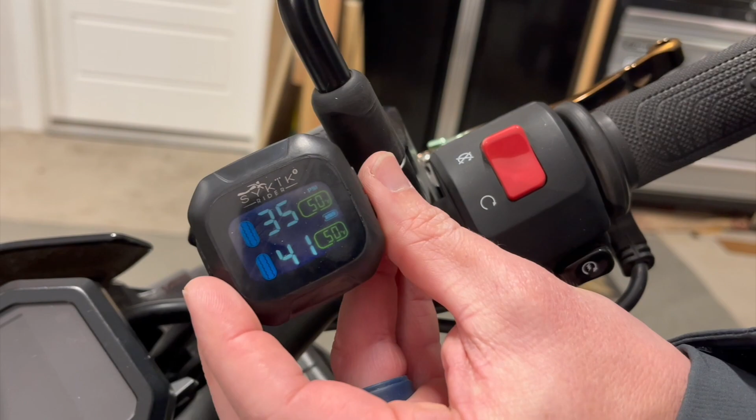Let's go. So I think I want to put it right here on this mirror mount, and I kind of want it to be like just like that. I think that would be perfect. So I think what I'll do is I'll start measuring and get some designing done.

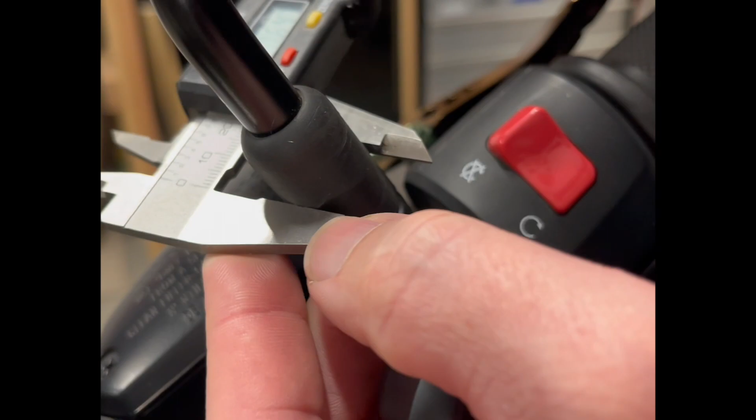And I'm in Fusion 360. Make sure I'm in millimeters because that's what I'm going to be basing measurements off of. And I'll start a sketch. So I want to mount this around the mirror post, and I measured that as 20 millimeters.

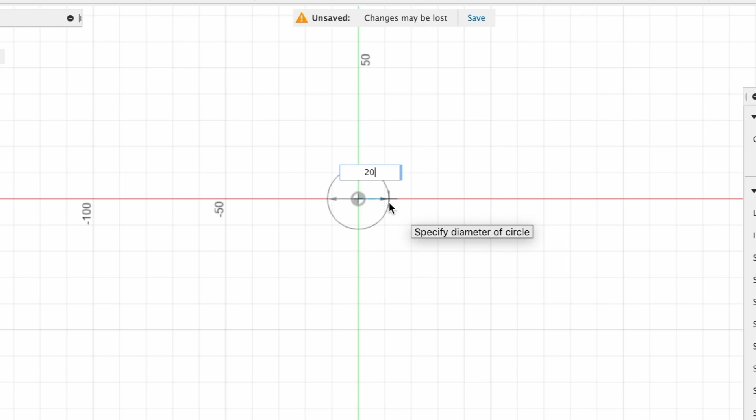So I'm just gonna put in 20 there, and then I'm going to do an offset from this, and I'll make that—what's 4 look like? Yeah, we'll do that 4 millimeters thick. Okay, and then I'm going to draw a construction line.

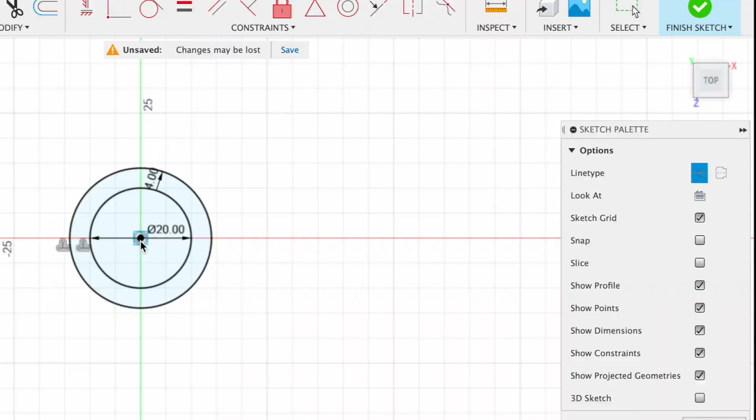Just for measurement purposes. And then, because I need to split this so that it can go around the mirror, I'm going to draw another construction line. I'll go out 4 millimeters. And another construction line, 4 millimeters. Again, this is really just so that I can get an accurate cut here on this.

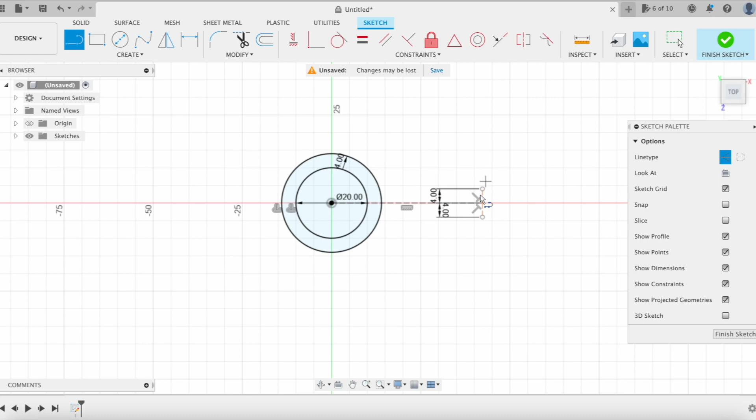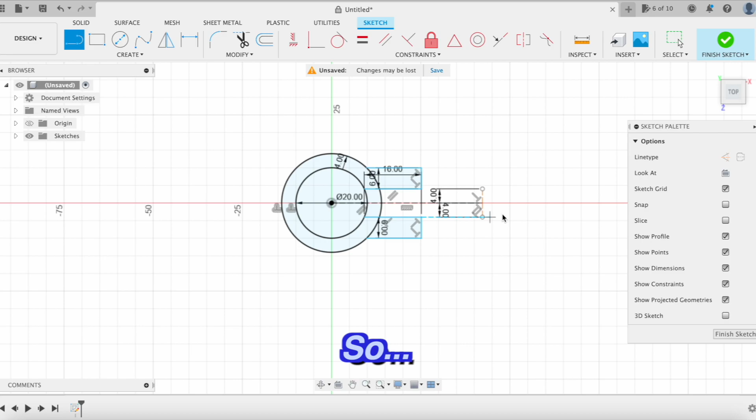Turn off construction lines. We'll do 15—no, it's 16. And then I'm going to do the same thing on this side here. I could have just mirrored all of this, but I didn't. So that's pretty much it for that.

So this is going to give me my opening for the mount, and I'll be able to stick it into the mirror post, and then it'll give me adequate area to put like a nut and bolt through. And then on this side, I need to kind of make a line that goes out so that I can mount the monitor itself. I need to make sure I get it kind of out here more.

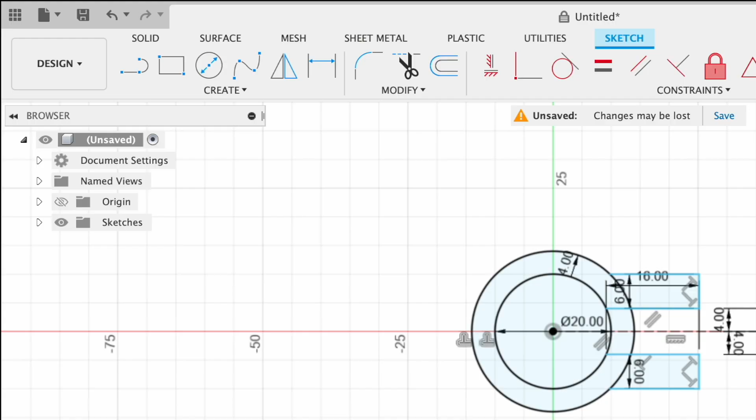So I'm going to, maybe I'll do a spline. I kind of want it out here. I'll do a line. Gotta make sure that this is big enough. And then I'm just gonna cut away parts of this that I don't need anymore.

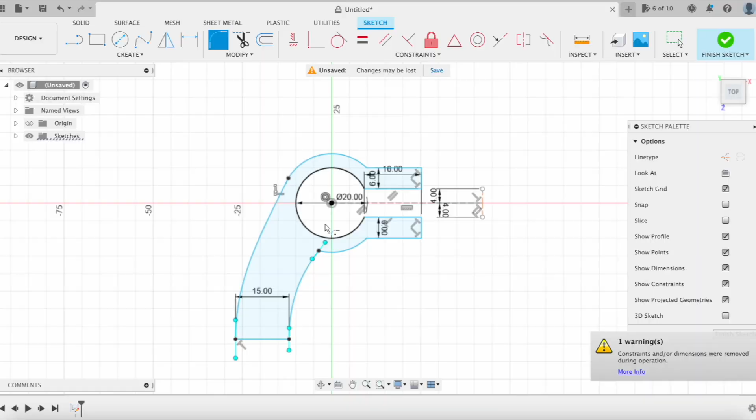I think I'm going to go ahead and add some fillets now. I think I'm okay with the overall shape right now. I think I'm ready to extrude it out. Again, nothing is really defined here—like you can still see it's blue, not black—but again, it really doesn't matter at this point.

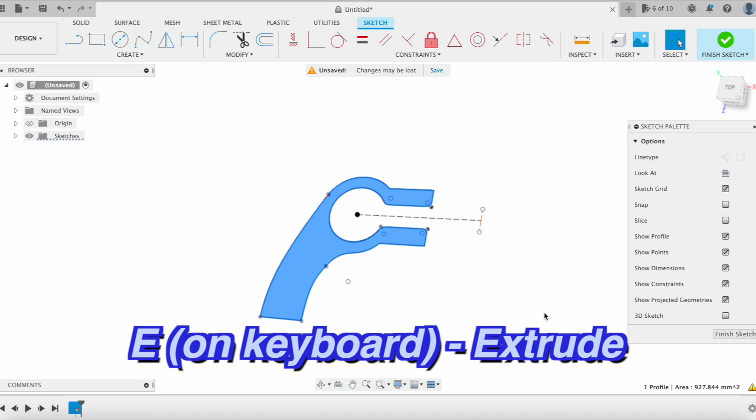And this needs to be 9 millimeters thick, pretty good. So I do want to make this part here a little bit thicker so I can put a bolt and a nut through. So I do need to extrude this part out.

But before I do that, I got to create another sketch. I'll do it on this face, and then I kind of want to—I'm going to use this top shape, so I hit P to project that, and now I can use these points to help my extrusion.

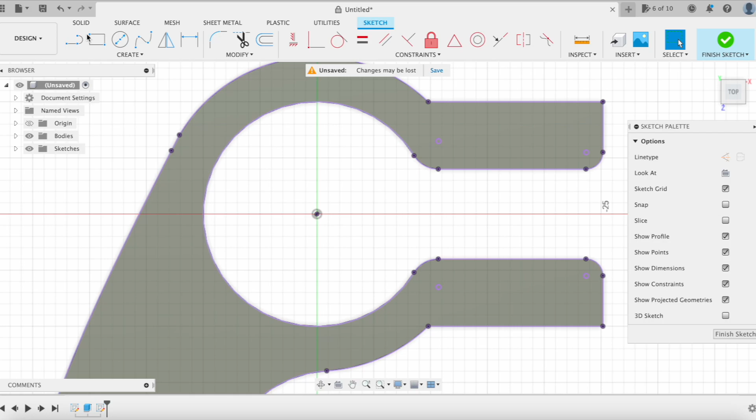So I'm going to do a line, I think I'll go to that point there, and there to there. So now I can use this to extrude this out. So this is 9, I want it to be a total of 15 millimeters, so I can extrude it out 6 millimeters.

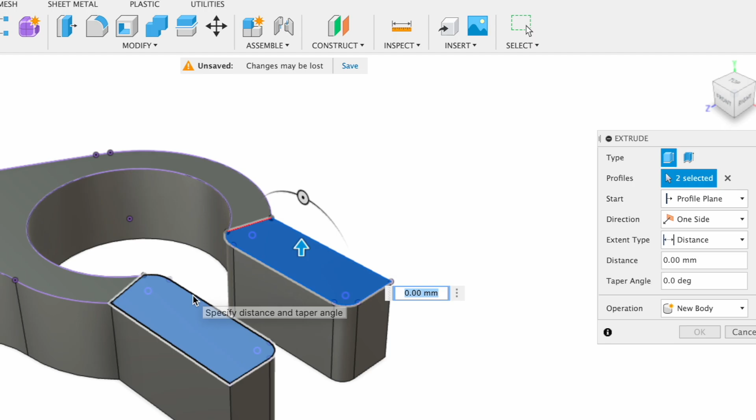That might be a little too tall. Yeah, that looks better. Okay, now I'm going to go ahead and put in the holes.

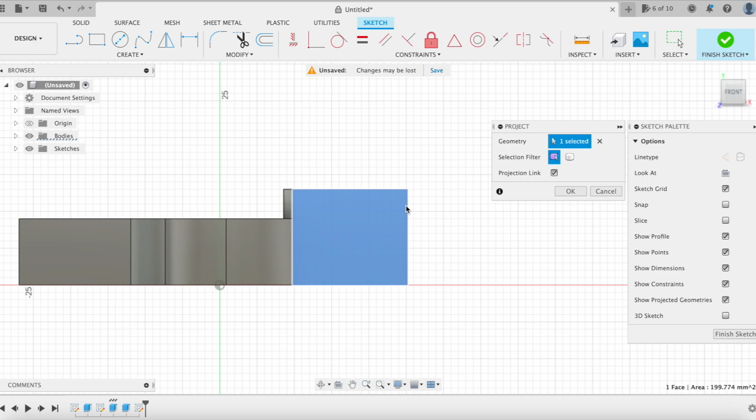Create a new sketch on that face there. I'm going to press P to project this. Okay, now I can use that as a measuring point.

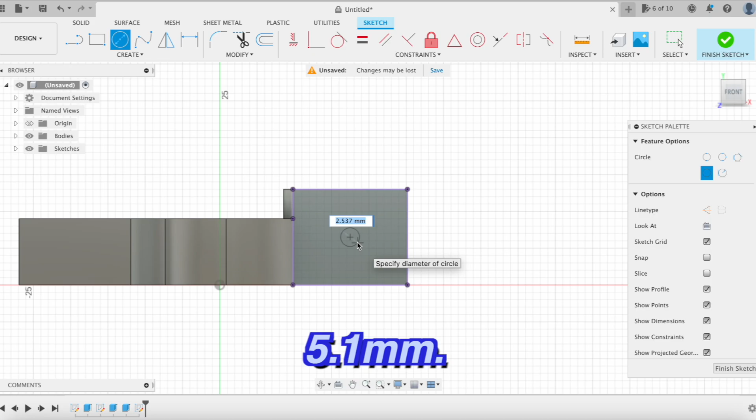So I'm going to get my circle, find the midpoint there, and this needs to be my inner circle for the bolt to go through. That's going to be 5.1 millimeters. I'm going to be using an M5 screw and nut, and I'll do an inset for the bolt head. I'll do 8 millimeters for that.

Redo that polygon. And then I'm going to constrain it by making this line parallel to this line.

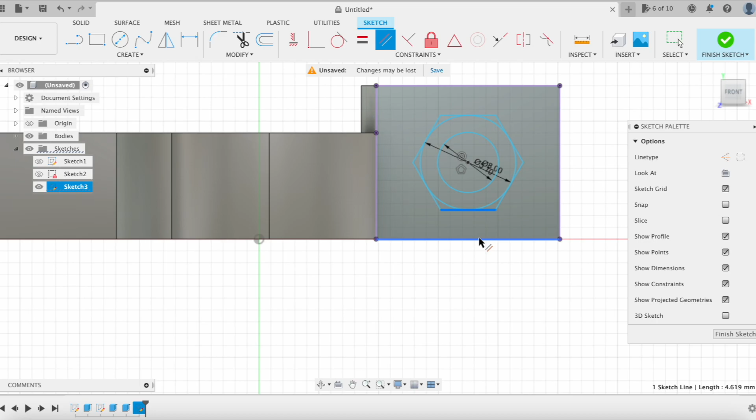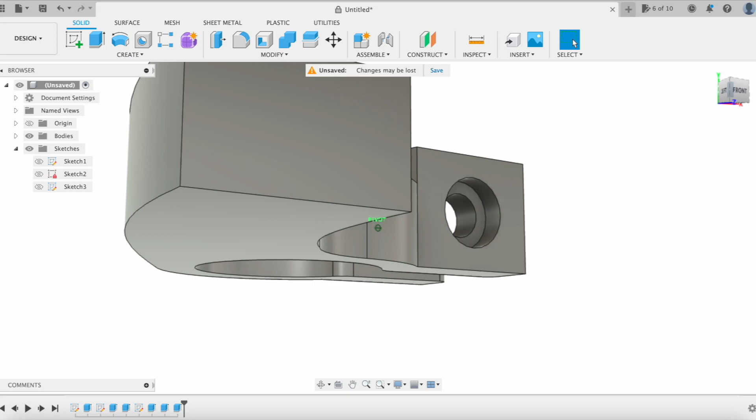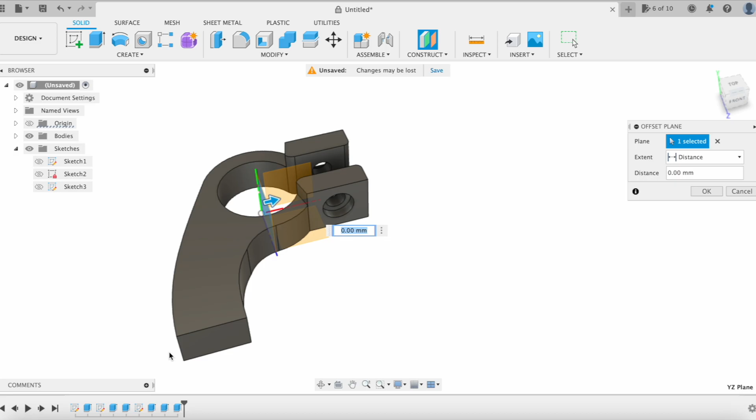So now what I'm going to do is make a new plane so that I can sketch out how I want this part to be, and I need it to be a sketch onto this side because I need to get an angle here that I can extrude out the other way. So what I'm going to do is make an offset plane. Let's do that one, and I want it to go to here.

Doesn't have to be perfect right now. Okay, now I can create a sketch on this plane, and then I'm going to project this.

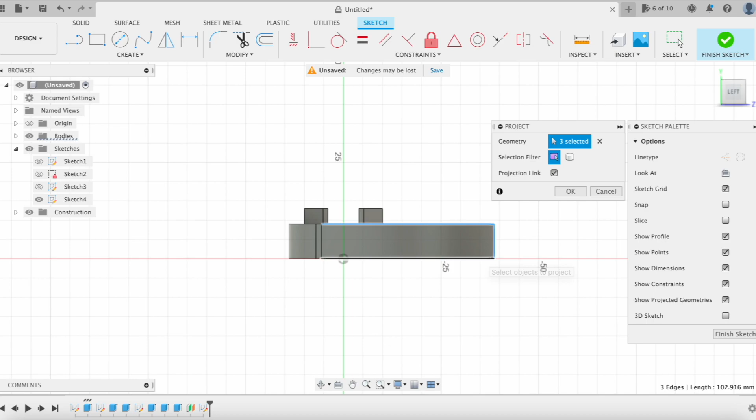So now I'm just going to do some lines, and I want to get the angle right here. So I think I'm going to do a 60-degree angle. I need this to be roughly 30 tall, and 60 degrees, bingo. And then a new line, it's going to be 10 millimeters long, and then I just need a parallel line back.

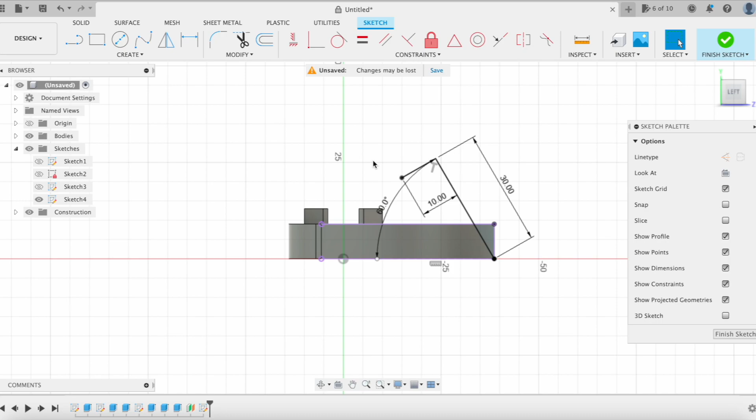Okay, that's exactly what I needed. So now I can extrude this.

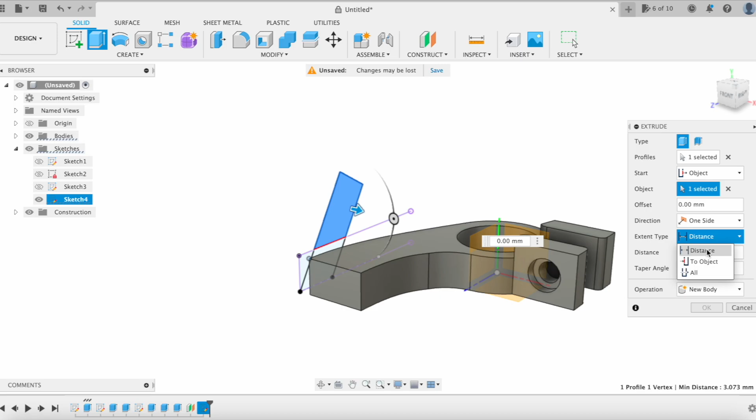And I want to start it here. There we go. Turn that sketch back on, grab this piece, and get rid of that. I think that's what I want.

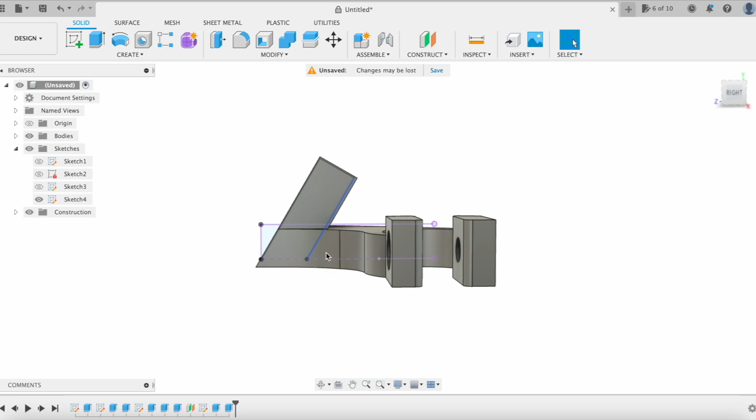Just need to add the bolt hole here, and then add some fillets to make it a little bit more smooth, because I obviously don't want this sharp angle here. And then I may have to add a clearance to get an Allen key through this part here. Generally speaking, I've got to get rid of this too.

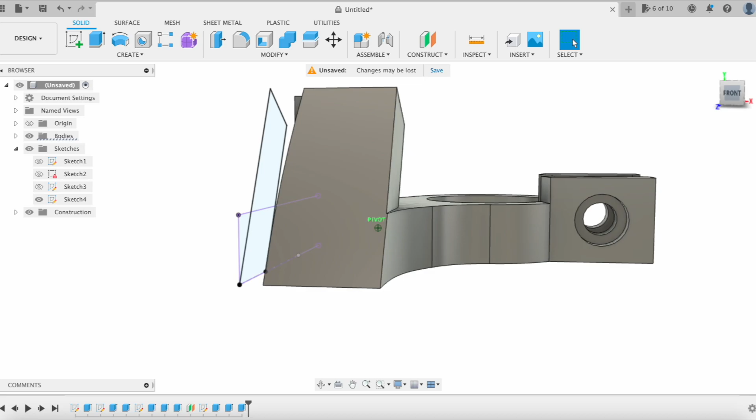I think what I'm going to do is grab that, and I can extrude that up. What I might do is just kind of extend this out rather than cut it away. Making this sketch.

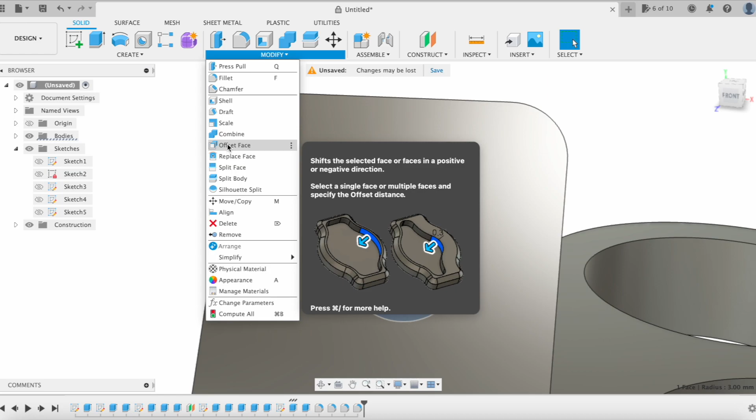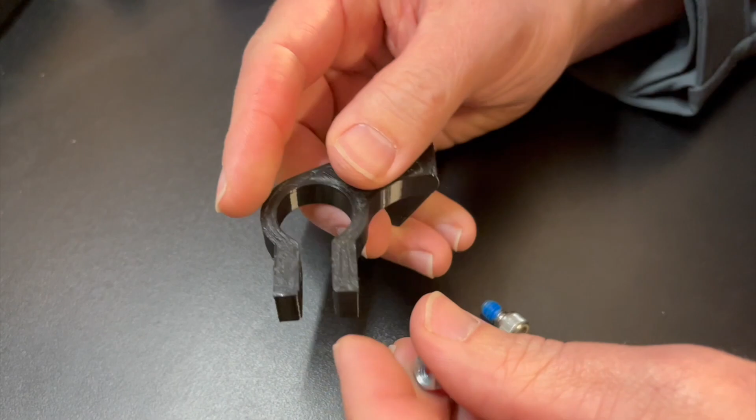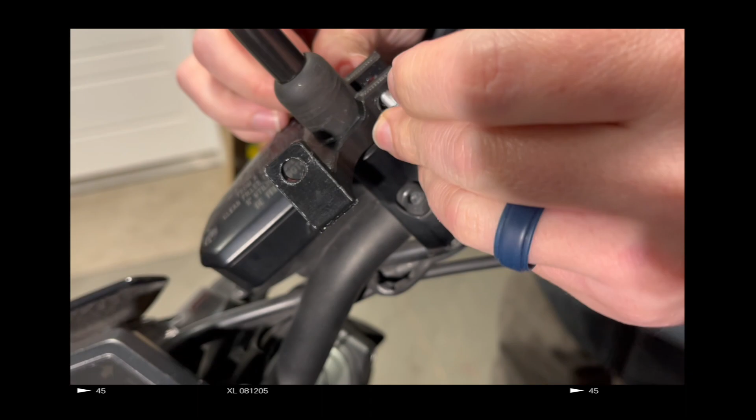So I designed it so that an M5 screw and M5 nut can just kind of recess in there. Let's put that in there. There it is, nice and secure.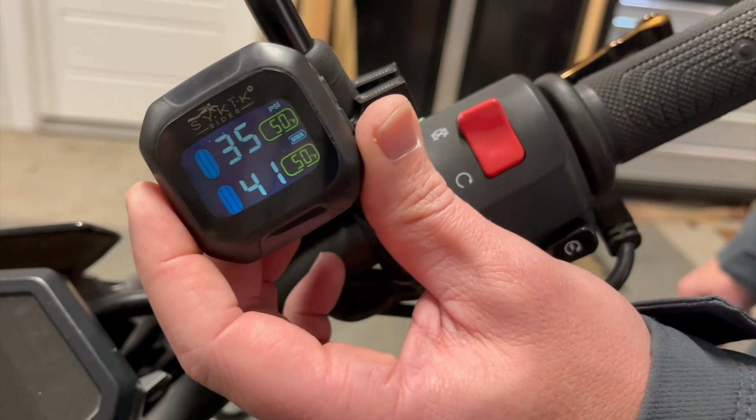So do you think this placement will work out better for you? Yeah, I think it will. I kind of like the placement up here. I think it'll be easier to read. So I like it up here versus down here where it was on this surface because it was kind of low there. So I think this is going to work out pretty perfectly.

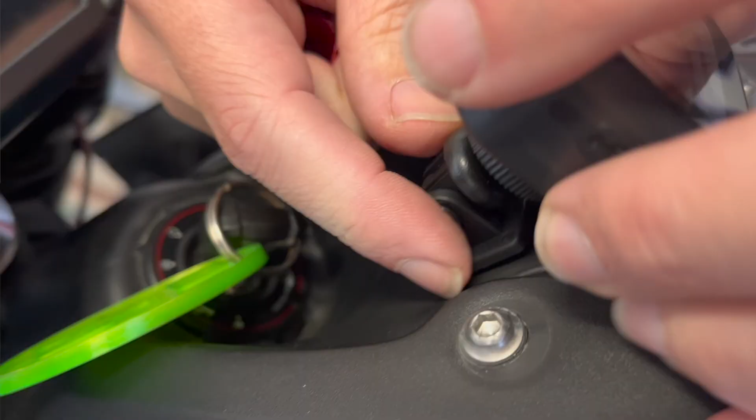So I know you like the placement of your new mount, but I noticed that you had to screw in your TPMS, and the other one you just kind of clipped in. So what does that mean? Well, it means that in order to charge this system, because you do have to charge it, and what I found is the battery in it lasts about a month, which is actually pretty good. But in order to charge this, I either have to take it off, unscrew it from the back to go charge it, or run an extension cord with a little charger on it so I can charge it on the bike. Kind of an okay trade-off, I guess, because it's more secure on the bike versus the other system. So it's a trade-off, but I think this is better.